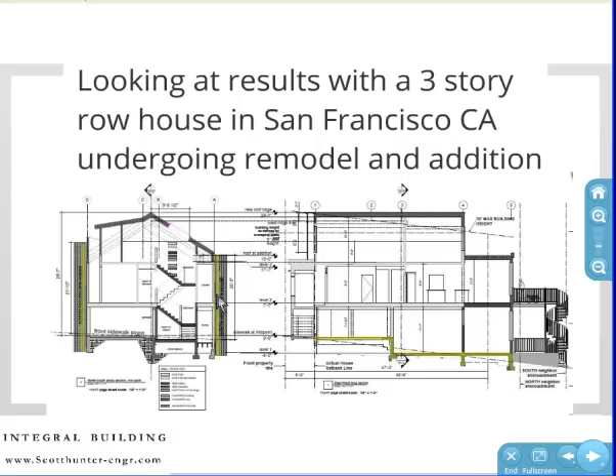We'll be looking at a 3-story row house in San Francisco undergoing remodel and addition. Notice that this is a situation where you have houses on both sides, so you don't even have access to the exterior walls. And it's on a slab on the ground floor. This turns out to be important.

So we have a comparison of the transmission and ventilation losses for a typical California construction, if this house was done to barely meet code now.

After applying common sense, basically increasing the insulation and reducing the leakiness of the house, we get a big improvement.

When we further apply passive house energy modeling, quantitative energy modeling, using some of the scientific tools, we get even more improvement.

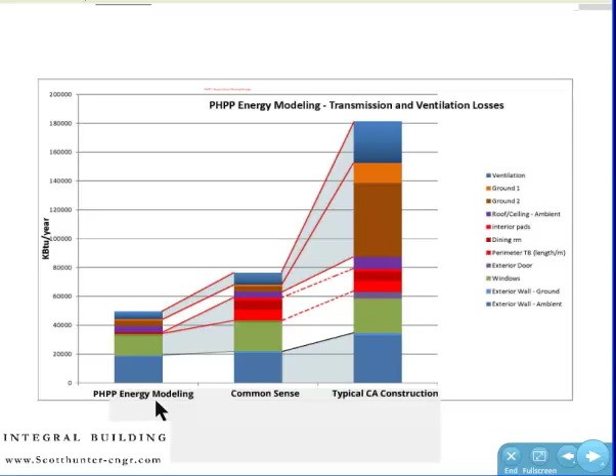Comparing common sense and the typical California construction, the biggest change is by insulating under the slab. Another big change is when we go from a leaky house, 8 air changes per hour at 50 Pascal with no heat recovery ventilation, to a fairly tight house.

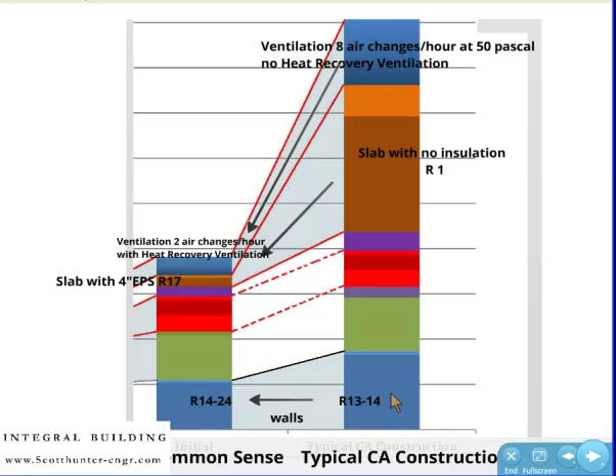We go to 2 air changes per hour at 50 Pascal with heat recovery ventilation. We also get improvements when we increase the insulation in the walls, primarily by increasing the insulation in the new walls of the addition.

If we compare passive house, the PHPP energy modeling results, and our common sense approach, if we increase the air tightness further from 2 air changes per hour to 1 air change per hour, notice it's not a big difference.

If we improve the windows, and we'll see more about that, we also get some improvement.

But the real improvement here is when we get rid of the thermal bridges, and when we insulate the one wall which was thought not worth bothering with because it was too hard to get to, it had wood paneling, too much trouble.

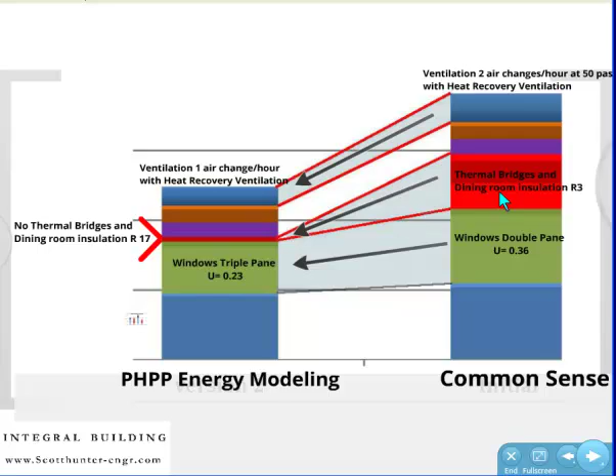The windows, if we have double pane windows with the typical low gain glass, that reduces the chance of overheating, but it also reduces the amount of solar heat that comes into the house.

Basically, we have about twice the losses through those windows over the course of the year compared to the gains we get through those windows.

If we go to triple pane windows and we have the high gain glass, clearer glass with appreciably less tint, we see amazingly slightly more energy coming in through those windows over the course of the year than is lost.

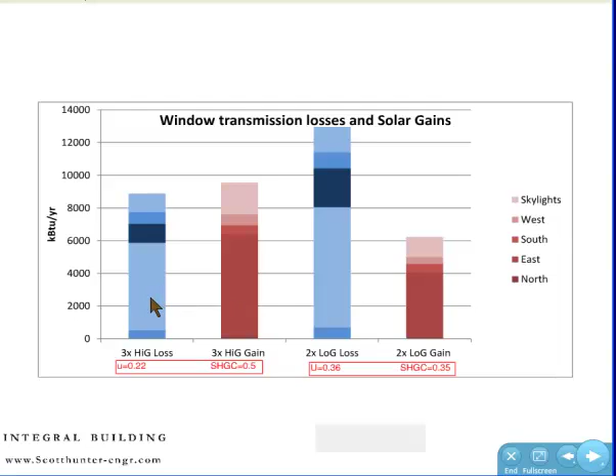Let's look at what we mean by these thermal bridges. Ideally, where we have a change in geometry, we have a constant temperature on the inside of the building.

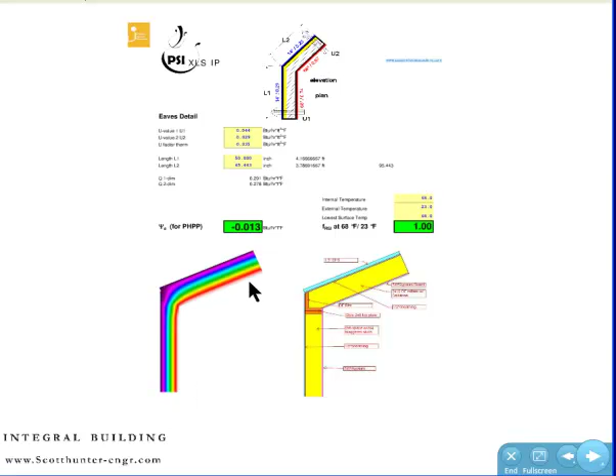These are colors, and that constant color means we have constant temperature. This is how it ought to be.

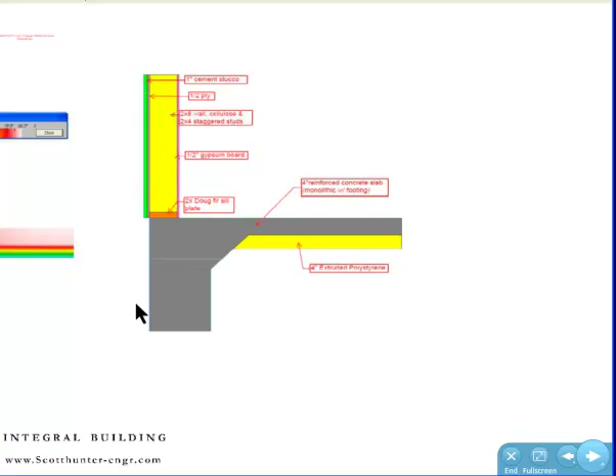We see that the temperature of the slab in the middle is room temperature, and the wall is room temperature. But toward that corner, under severe conditions, the temperature can go down, way down.

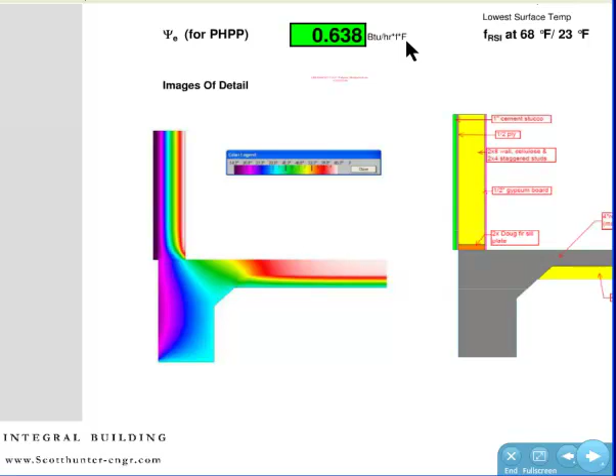We can actually put a number to this effect. This is 0.638 BTUs per hour per foot along the length per degree Fahrenheit. Less than 1 BTU, it's not a big deal, yeah?

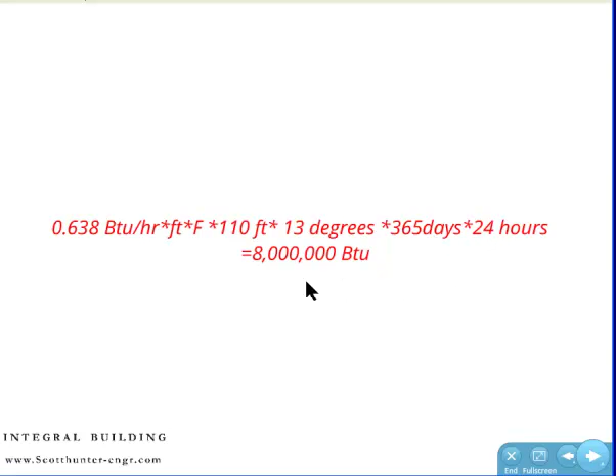Times 13 degrees, the difference between the inside and the outside, times 365 days, times 24 hours, is 8 million BTUs, or 80 therms.

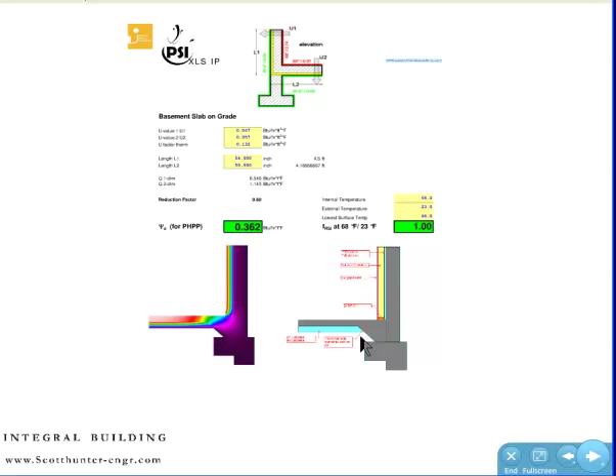Similarly, where we have a retaining wall and the slab connected monolithically, we have this poor result. And where we have a post coming down, structural engineers would typically expect to stop the insulation.

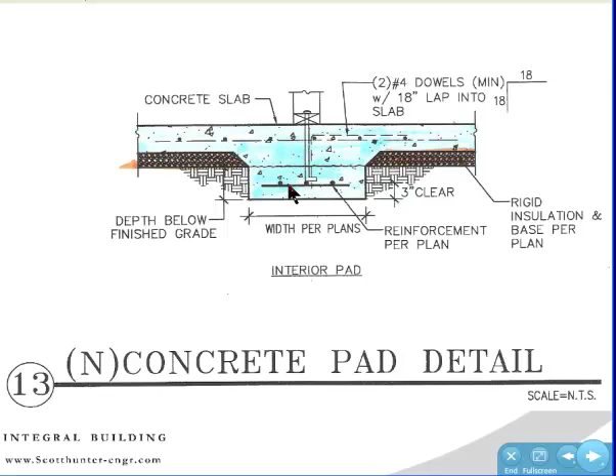We have a 2x2 or 3x3 area where the interior slab is connected directly to the ground. Those are all thermal bridges.

So if we get rid of these thermal bridges, how do we do this? We run the insulation under the slab and right up to the corner, up to the wall. This is a different color because it's a denser insulation, just in case here in seismic California we have some pushing, some slamming against that location.

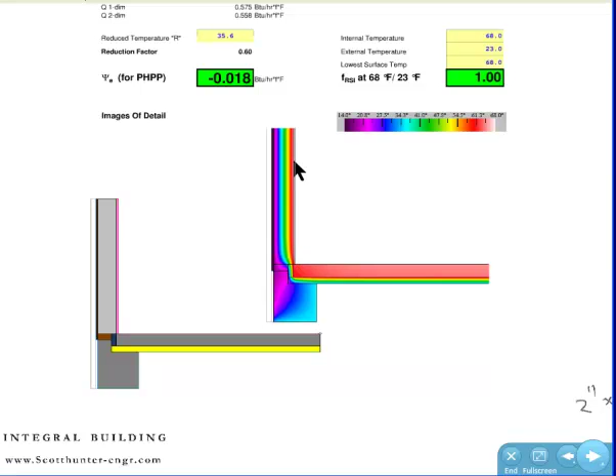Here we see that the inside of the slab all the way to the corner, same as the wall, is all one temperature.

Similarly, we run the insulation up. We can even have a nailer here. This is a practical solution.

And we see that the inside temperature is constant. The thermal bridge calculation actually comes out to be negative.

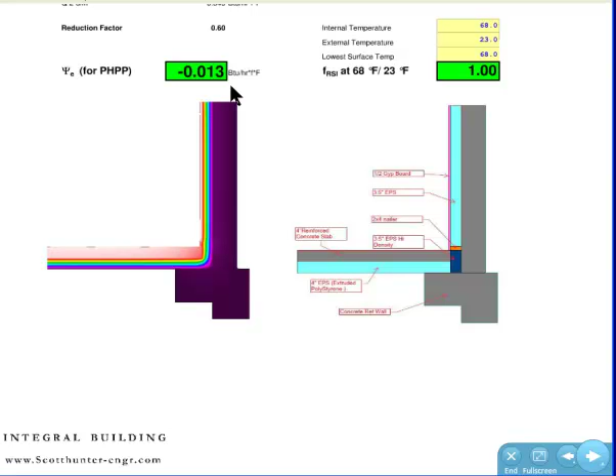If we neglected it and said we're just going to consider that we don't have a thermal bridge here, just using our simple results from the area calculations, we would be conservative.

Underneath that post, we can put foam glass, say a 1 foot by 12 inch by 12 inch square that can take almost 13,000 pounds per square foot, ultimate.

If we use a safety factor of 2, that's 6,500 pounds. If we have more than that, we can essentially thicken this slab to spread the load more.

But the foam glass, in addition to being so strong, has about the same insulative properties as styrofoam, as insulative foam.

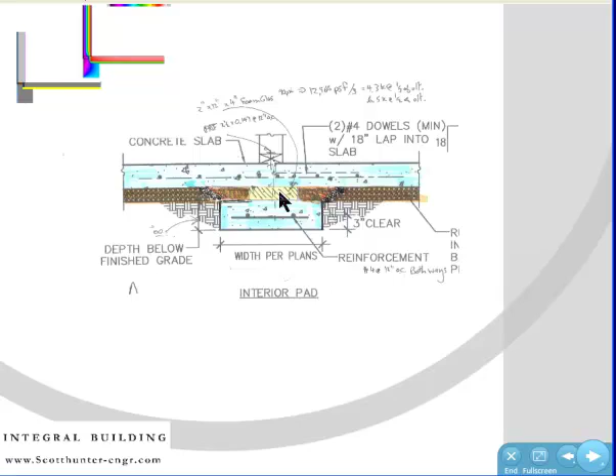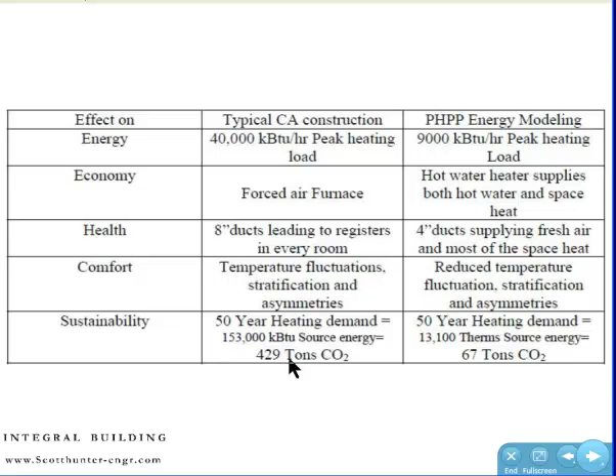And over the course of 50 years, we can reduce the carbon dioxide generated from 429 tons of carbon dioxide to 67 tons. Thanks.